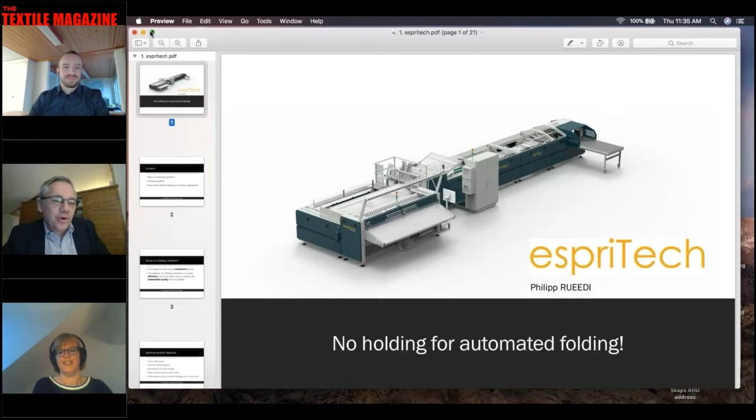Yes, hello. A very good morning, or very good pre-lunch time, I should say, to India, and a good morning here from Europe. Thank you, Cornelia and Ganesh, for the opportunity to speak on this webinar. My name is Philipp, representing Espritech, where we produce automated textile folding machines since many years. Sam Gerber, our CEO, has spent almost his entire professional career on this topic of textile folding.

Over the years, he developed a full range of textile folders that I'm going to show you in just a minute. We are definitely a niche player in the textile machinery sector. We uniquely focus on providing the best textile folders to the home textile industry worldwide. India is currently the country with our biggest installed base, and we have a service engineer located in Vapi.

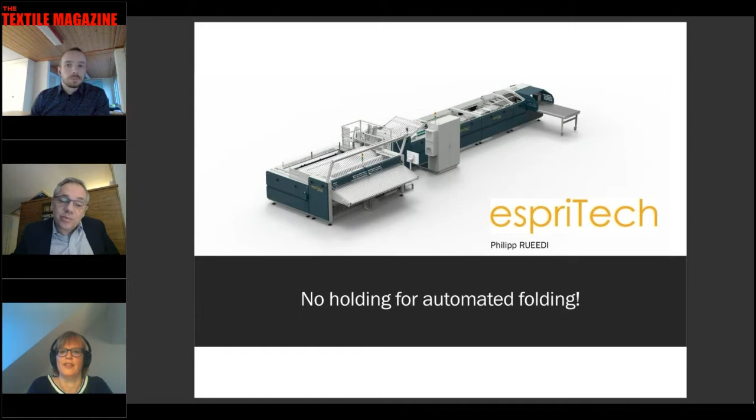The title of my presentation is 'No Holding for Automated Textile Folding.' Of course, that is a slightly provocative title with a double meaning. It refers, first, to the increasing requirement of processing fabrics without touching them. Second, and more important, is the trend towards more automated and maybe also integrated manufacturing methods in the textile industry. Espritech machines provide solutions for both aspects.

My presentation is divided into 3 parts. First, let me talk briefly about what a folding machine actually is, as there are different types in the market. Second, I will go very quickly through our portfolio of machines. In the third part, I will touch on the commercial aspects of automated folding and refer to some business models in which they can operate attractively.

What is a folding machine? There are two aspects to it: one is the function and one is the purpose.

It is difficult to control fabrics, as we all know, because they tend to behave chaotically and provide little stability of their own. In a roll-to-roll or sheet-to-sheet process, you can more or less control the material, but in folding you have to let loose. You cannot fold if you keep the material fully controlled.

Furthermore, precise results must be achieved continuously and fast. Why am I putting so much emphasis on this topic? The reason is it cannot be done with mechanics alone. What we produce is more than just a 15-meter long mechanical Swiss watch.

Espritech combines several competencies to tackle the task. There is a lot of mechanics, for sure, as well as an elaborate electronic steering, about 30 motors, servo drives, and linear motors, and about 250 sensors working combined with pneumatics. In order to secure good results, Espritech provides a mechatronic machine.

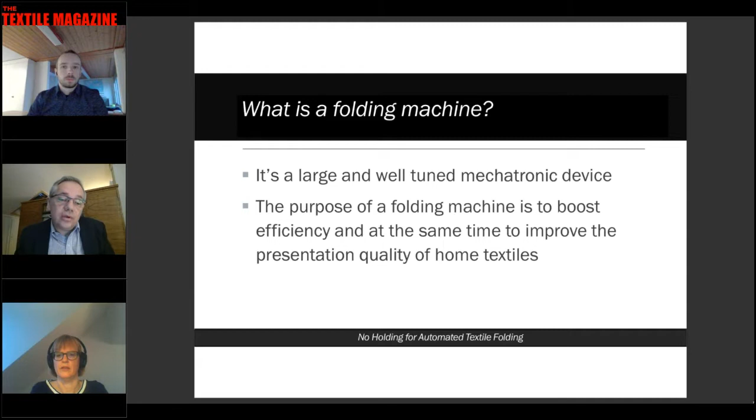You should involve your marketing department. With attractive folding patterns, you can improve the presentation quality. You can also standardize your package formats and your logistic handling, which is often a cost driver.

General features of our machines: all Espritech machines fold to precisely defined measures. We offer various folding patterns which can be individually optimized to your products. All our machines are built in modules which can be adapted to achieve individual requirements.

All our machines are intuitive to handle, but I am not hiding from you that they need an operator who can program the folding steps and who really wants to get the most efficiency out of them. After that, the machines need no changeover nor further setup times. The folding modules position themselves to do the programmed task. So load them, select the program, and let it run.

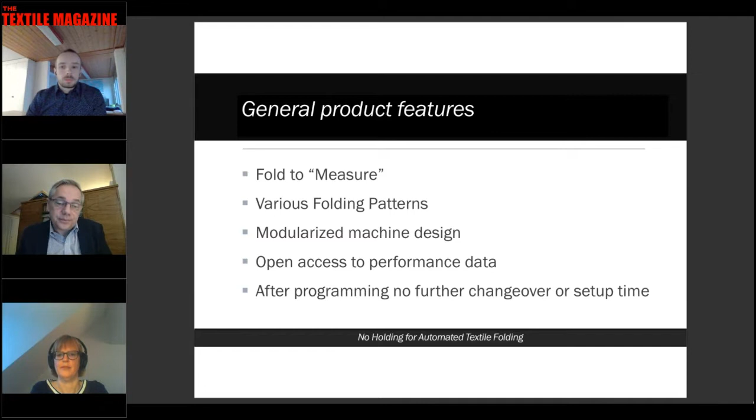Let me briefly go through Espritech's product portfolio. I start with the Blue Sapphire model, which is our apparel and small towels folder. It can also do kitchen towels and other flat products for garments. The capacity of the Blue Sapphire can reach up to 1,050 folded items per hour with only one operator. If I count right, this is more than 17 units per minute.

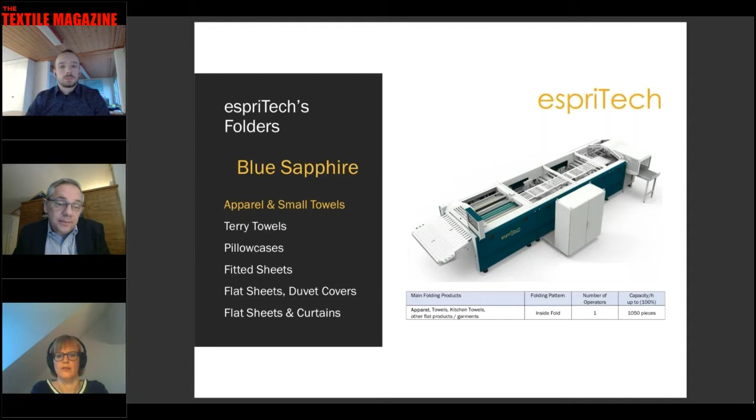The next model would be the Black Opal, which is dedicated for terry towel folding. Towel folding is one of the most challenging tasks for us because the fabric is thick and tends to skew. Even worse, it tends to bow in the folding process itself. Espritech has developed folding patterns which can eliminate or at least hide these problems.

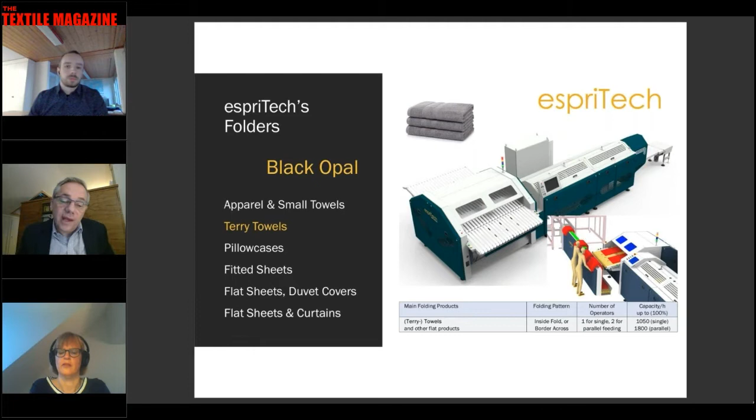For sizes above 70 centimeters, we can fold up to 1,050 with one operator. For sizes below 70 centimeters, we have a parallel feeding option, which you can see in the picture on the bottom right, and then production can go up to 1,800 pieces per hour folded.

The White Sapphire is another dedicated machine for pillowcase folding and other small flat products. The machine can do single or pair folding, and it can reach up to 1,440 pieces folded per hour, which is actually quite a brutal speed. Not our most flexible one, but definitely one with an extremely high output.

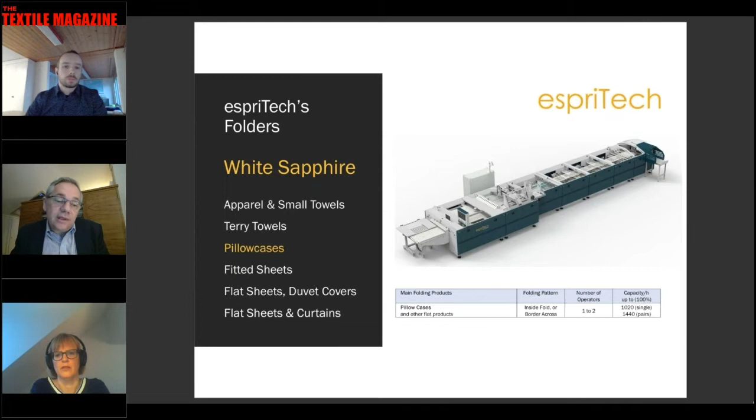The Red Diamond is the first one of our Diamond line. These are the wider machines. They usually have a laser which helps product placement on the feeding table, which is important for best folding quality. This machine can do flat sheets or flat products, but I would say it's mainly dedicated to fitted sheets.

Personally, I struggle five minutes to fold even one manually. With the Red Diamond, you can reach up to 9 fitted sheets folded per minute. The folding pattern here is inside fold.

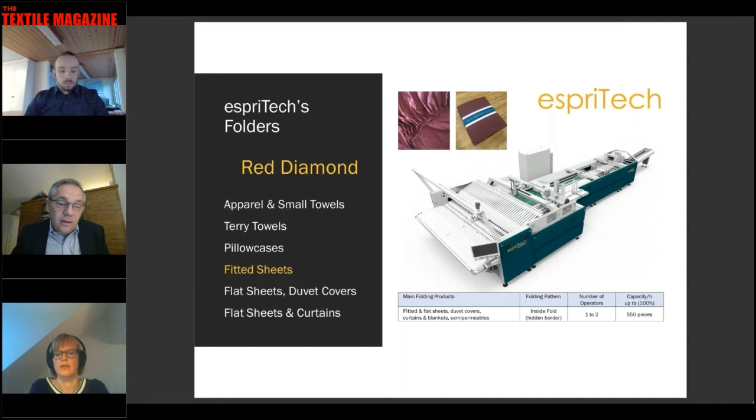So this is a machine which specifically combines high output with the ability to improve the product presentation. It can perfectly place the border of a fabric on the face side across of the final package.

The White Diamond is also available as a set making machine. That means nothing else than that the machine continuously changes the folding process for each item that you load. So you can load, for example, a flat sheet first, then a fitted sheet, and finally two pillowcases, and the machine will combine and assemble them into a set.

The black diamond, last but not least, is simply the mother of all folding machines, I would say. To my knowledge, it is the most versatile folder available in the market worldwide. Features are similar to the white diamond, but it has a 90-degree turned in-feed table, as you can see.

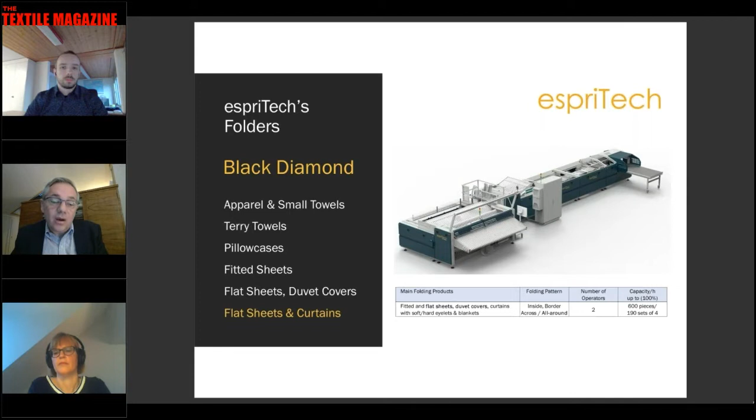We also sell it to high-quality producers, which focus on handling smaller load sizes, but with a higher degree of product personalization. Also, the black diamond is available in a set version.

Unlike manual folding, we do not need the cardboard to define the folded dimensions. That's actually what you do in manual folding. Leaving away the cardboard can be a way to add sustainability to your product.

The Motif Function, please watch the video uploaded on my LinkedIn profile yesterday. It is a feature that is mainly used for digital printed fabrics, where you have motifs and you want to show them exactly on the top face of your final package. It looks easy, but actually there is a lot behind it.

In collaboration with Smart MRT from Singapore, we can offer a solution for color shading issues by keeping similarly shaded fabrics together. Smart MRT provides hanger systems within the textile finishing production, and they also secure that we have enough fabrics in front of our folders.

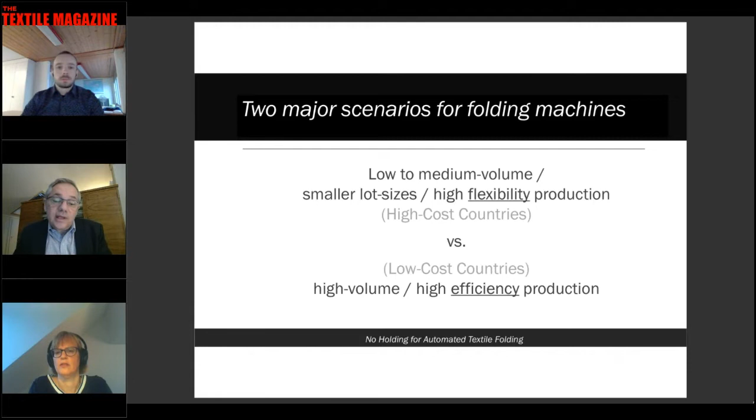I do not think that is the preferred model for the key players in India. What India and other low-cost countries require are solutions to tackle high volume with high efficiency. What are possible options for the labor-intense part of textile finishing in India?

The first scenario is the present status quo: stay with manual processing. That would mean avoiding initial investment - that's positive. But you keep a high labor force, face salary increases and issues of low efficiency, and suffer large stocks between process steps, therefore ongoing high net working capital requirements.

The second scenario is to replace labor with machines. This requires a mindset change - you need to program machines and the production flow. It also means machine maintenance and working in shifts to make best use of capital investments. It means a good relationship with machine vendors because they provide the machinery that is the new heart of your process. Efficiency gains can be substantial though.

I'll give you an example. We recently had a customer in Europe who bought one Espritech folder and replaced 15 manual folders with 2 operators on the machine. That is a ratio of more than 1 to 7.

Now imagine that in a 3-shift scenario, reducing workforce by 39 people per machine, while most of the big producers in India will have volume for several machines. We are really talking big impacts here.

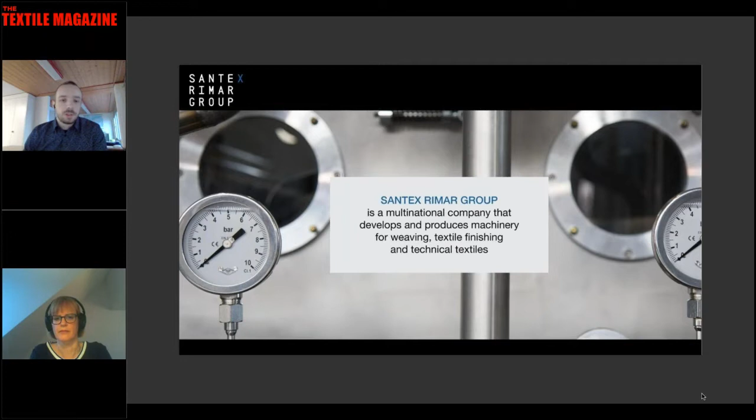Smit is globally recognized as a forerunner in weaving technology and is a manufacturer of weaving machines, renowned for its high standard levels of innovation, productivity, and versatility, ensuring competitiveness throughout a large variety of applications. With more than 50 years of experience, Isotex offers not only a wide range of products, but also innovative and customized solutions.

Santex is at the forefront of technology for textile finishing of knitted fabrics, such as cotton, blended cotton, and viscose. The goal of Santex is maximizing performance at low energy to achieve low residual shrinkage, soft hand feel, and luster on surfaces of textiles. Many of the most world-famous fashion houses rely on the know-how of Santex, which was founded in Switzerland in 1982. Santex offers specialized machines for open-width fabric surface treatment, as well as various energy-saving options, which result in customer benefits through sustainable production and low CO2 values.

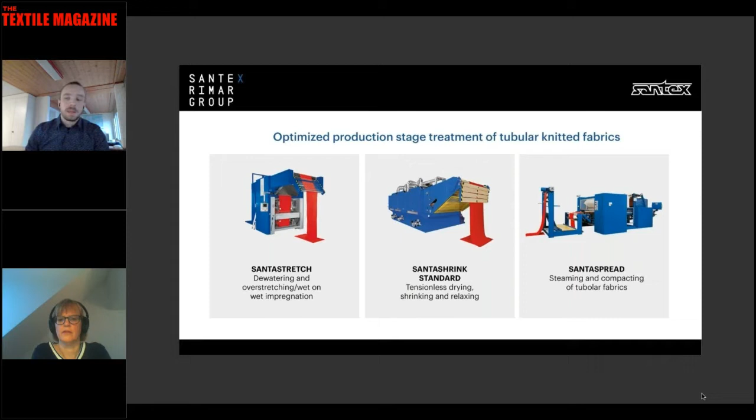The standard version of the Santa Shrink series serves as the basis for the Santa Shrink Progress machine, which is usually equipped with 3 or more drying chambers.

Pin frame entry for width stretching and wet compacting as preparation of the fabrics prior to drying offers unequaled quality gains. The equalizing frame, featuring a needle chain, is the most important part of the extended inlet. The total length of 5.345 meters includes a horizontal swiveling section of 4.5 meters, which permits gentle opening and overstretching of fabric.

The inlet can be of very simple design with a centering device and a feeding support. In general, a dewatering padder is provided and in most cases also an impregnating padder.

Santa Compact RD is suitable for fabrics made of natural and man-made fibers, as it provides the minimum possible residual shrinkage values in the compacting zones and delicate handling of fabric through the machine.

Electronic force measuring rollers are at every regulation position, providing total control over fabric tension, extremely gentle fabric handling, and allowing settings to be stored in a recipe for added repeatability.

At the heart of the Santa Synpact's incredible performance is how the rubber shrinking unit and specially dimensioned felt compacting unit work together to double both the sanforizing performance and speed over standard compactors.

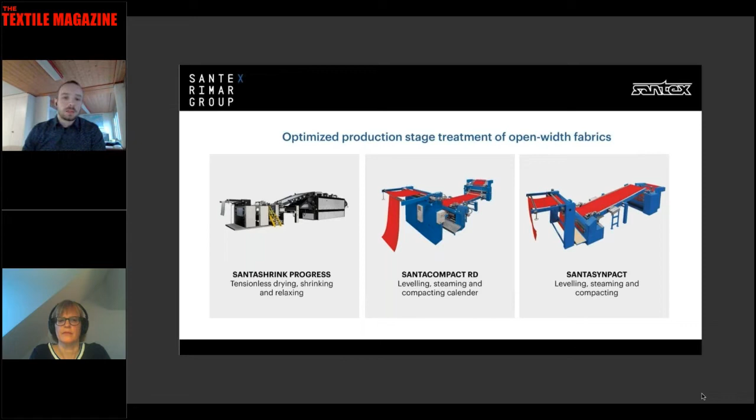High performance and precision in terms of efficiency and uniformity of treatment assures customer value and quick return on investment. With its design and thermal insulation, the Santa frame ensures cost savings in comparison to conventional stenter designs.

The performance and production of the Santa frame is based on continual development using the latest advances in thermodynamics, allied to the changing needs of customers.

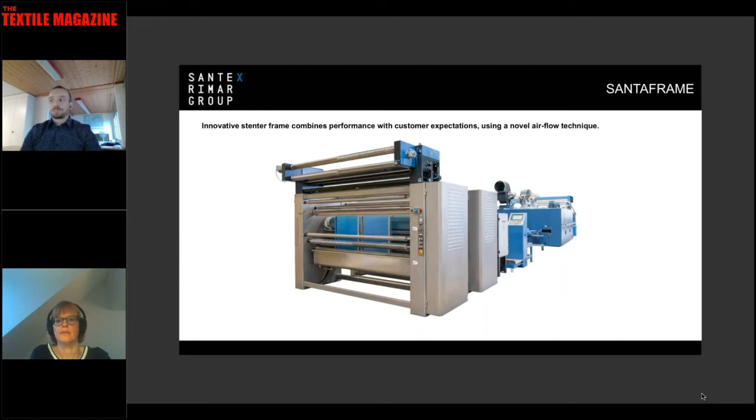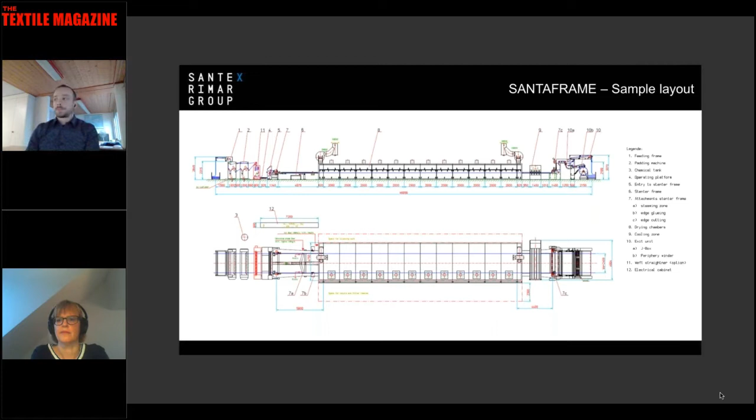This arrangement eliminates the risk of condensation dripping onto the fabric. Positioning the heat source on the pressure side significantly increases the evaporation rate without any change in energy consumption, due to the higher airspeed and specially designed nozzles.

Excellent quality of the treated fabric due to the suitably designed AERO-SURF nozzle system promotes even treatment, excellent residual shrinkage, and softest handle for sensitive fabrics.

Minimal combustion residue by utilizing semi-indirect gas heating as an alternative to thermal oil heating during the heat setting or curing processes. Increased performance and precise temperature control during processing with minimal energy loss, by introducing bulkhead zones at the inlet and outlet.

Savings in energy consumption as a result of a specially designed built-in exhaust air circulation duct, which in combination with heat recovery units reduces installation costs.

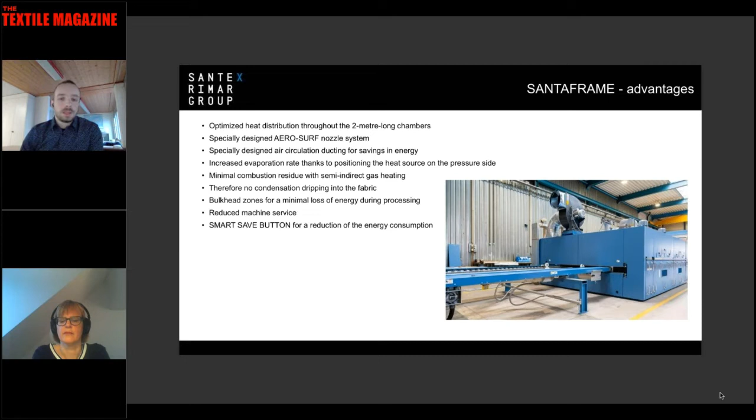The modular 2-meter-long chamber design allows complete pre-shipment assembly, cabling, drive assembly, and installation of the selected electronic control system before the machine is dispatched. The result: highest quality assured standard of all delivered machines.

The design of the Santaframe provides effective insulation and does not require floor foundations for installation. Bulkhead zones at the inlet and outlet of the treatment chambers form the drying and heat setting zone.

The bulkhead zones feature an automatic slot cover on the width adjustment at the fabric inlet and outlet, as well as an integrated exhaust air collection duct for the connection of an exhaust air fan.

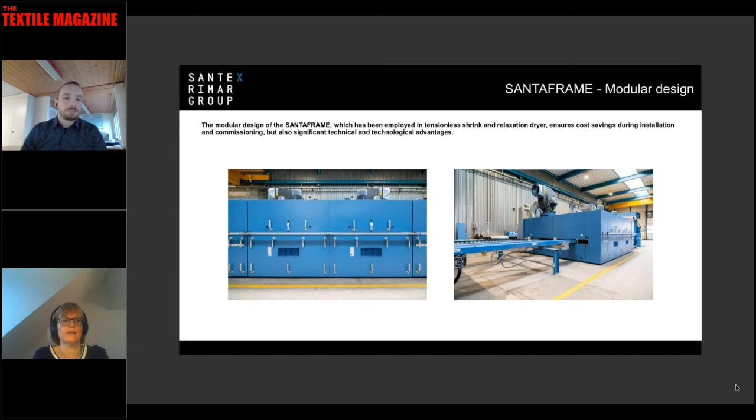The circulating air fan draws the air from the nozzle and treatment zone through the filter panels and directs it along a short path to the heat exchanger, from where it is fed into the nozzles. A regulating flap in front of the nozzle boxes allows the top and bottom airflow to be continuously adjusted. The arrangement of the heat source on the pressure side of the circulating air fan allows for a high air circulation speed and hence a higher drying capacity. The result is energy saving and cost reduction in the drying and heat setting of textile fabrics.

When the pin chain stops, the hot airflow into the nozzles is immediately diverted by pneumatically operated bypass flaps that close completely. The hot air is routed into a bypass where the process temperature is maintained. Once production restarts, there is no need to reheat the circulating air and fabric treatment resumes under optimum conditions at the required production speed.

With semi-indirect gas heating, the flames are located in a combustion chamber. Hot air is introduced to the circulating air via a large perforated distribution pipe, which ensures a very even temperature distribution. Conventional systems heat the recirculating air over the open flame of the gas burner.

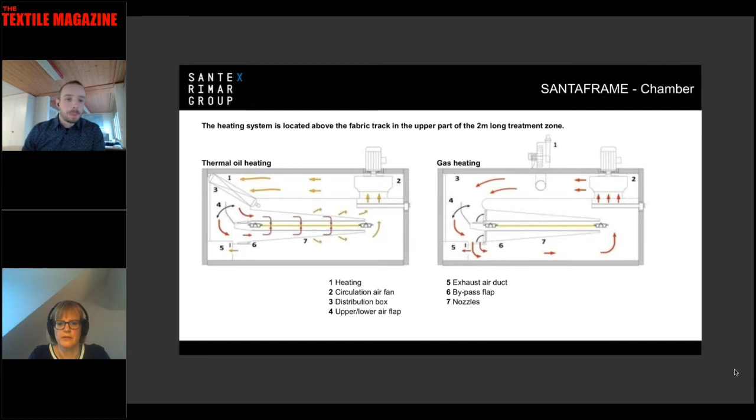The filter screens located above the nozzles simplify cleaning even whilst the stenter frame is running. The exhaust air collection duct is integrated into the lower part of the thermal processing chamber. Doors allow easy access for the adjustment of the exhaust air volume and cleaning of the exhaust air duct.

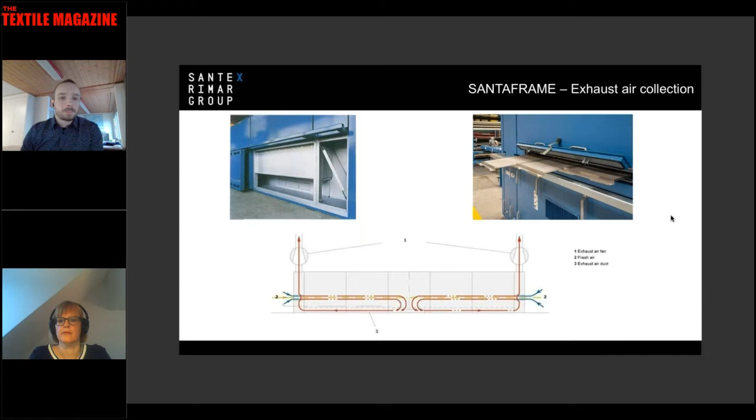Ring-shaped openings around each guide pipe ensure the controlled and turbulence-free return of air to the circulating air fans. As a result of the special nozzle design, the fabric floats on an air cushion, giving textiles a soft, voluminous handle and excellent residual shrinkage.

As an alternative to AERO-SURF nozzles, simple hole-type nozzles can be fitted for the finishing of woven fabrics, or slotted nozzles for the swirl-free treatment of pile articles. Santaframe contain nozzle boxes which are tapered on one side, inside which the nozzle plates are inserted. These nozzle plates can be easily removed for cleaning.

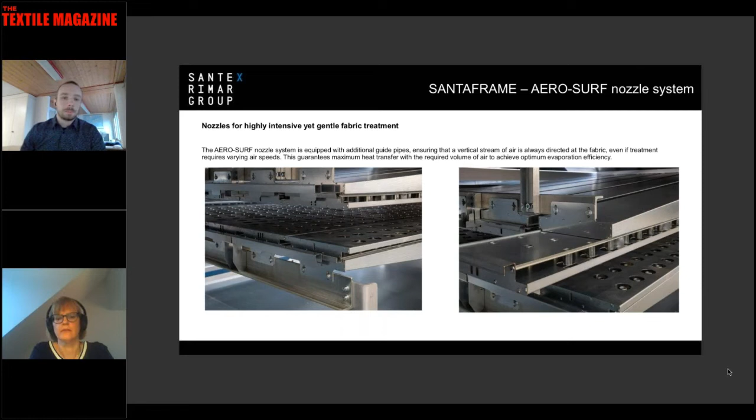Individual drives on the spindle type width adjustment system within the thermal zone of the Santaframe guarantee accurate width adjustment, ensuring flexible stretching of goods being treated, and can be programmed automatically from a central location. Fabric transport chains are equipped as standard with independent frequency control drives that can be run either synchronized or offset.

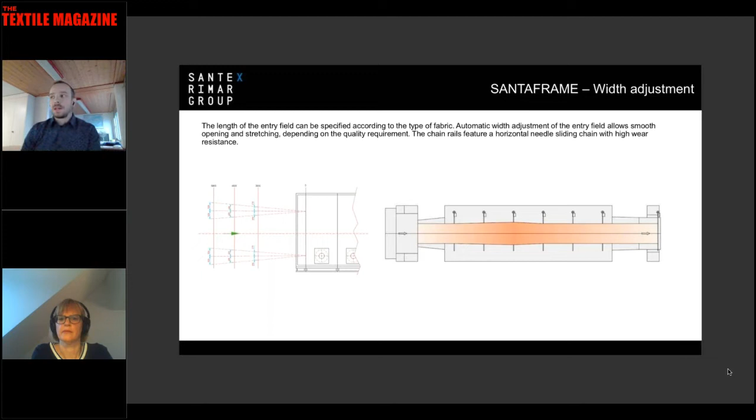The horizontal transport chain is designed as a gliding chain with high wear resistance, requiring very little maintenance. Chain links are made from high-grade durable PEEK material, or with ball bearing when processing heavier fabrics that require higher pulling tension. The carrier parts can be supplied with pin plates either with or without de-pinning protection, or as a combined pin clip or clip only. Depending on the requirement, special pin bars and clip types are available on request.

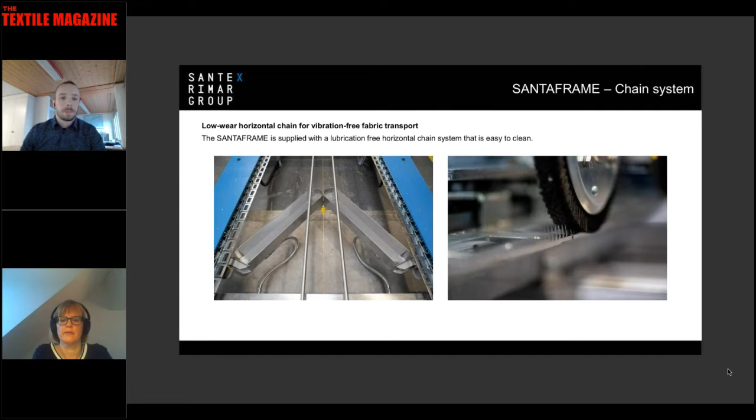One driven spreading roller is located in front of each trough. Two other spreading rollers ensure optimal uncurling of the selvage before the fabric enters the nip section. The impregnating trough with 65 liters content can be lowered for ease of cleaning. A displacer is installed to minimize the trough liquor content. The compartments are made entirely of stainless steel.

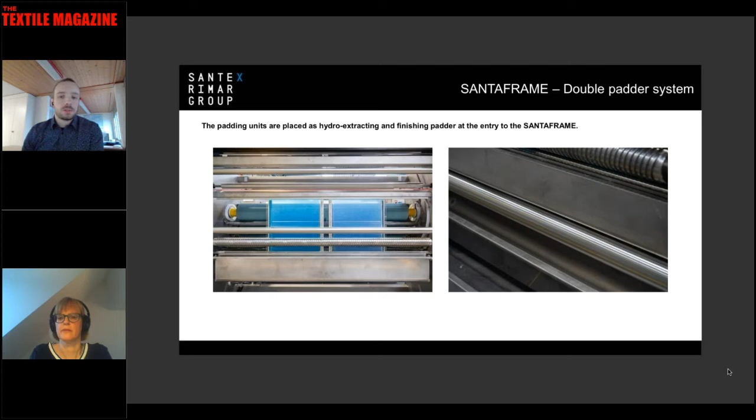Santex can offer various entry and exit configurations, such as unbatching systems for the most tension sensitive and less delicate qualities, unbatching systems for dye beams, centering devices for knits and/or woven fabrics, padders for the most diverse dewatering and impregnating processes. Automatic weft straighteners are available from reputable European manufacturers. Non-stop entry and exit options with either fabric troughs or storage compensators. Batching systems for the most tension sensitive and less delicate qualities. Batching systems for dye beams, or various exit combinations with plater. Special requests for fabric entry and/or exit can be offered.

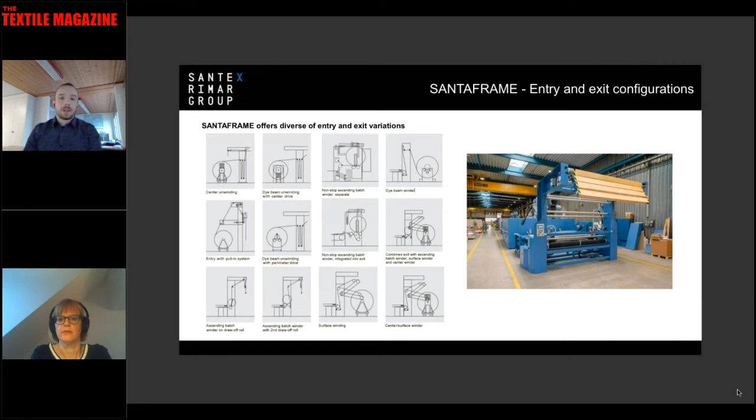The automatic process control and regulation, with customized programs containing all parameters associated with the finishing operation, setup and control require minimal operator input, affording greater operator freedom for observation, preparation and final adjustments. These systems administer the production data, incorporating production planning, quality assurance, as well as facilitating remote support, maintenance and diagnostics.

SantaVision hardware and software supports process visualization. Stored program control provides optimal solutions for automation, communication, data processing and storage on machines manufactured by Santex. SantaVision is installed on an industrial computer communicating with a PLC controller connected to the machine.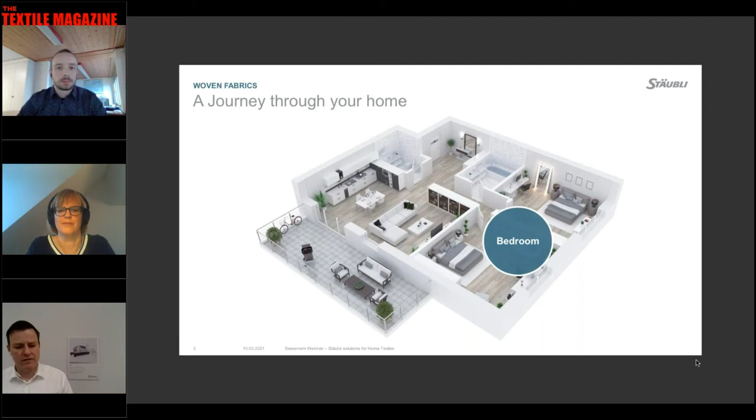So let's start this journey through your home, in your bedroom. In the bedroom, to manufacture these products, you need warp tying machines, you need dobbies, and you need drawing in machines.

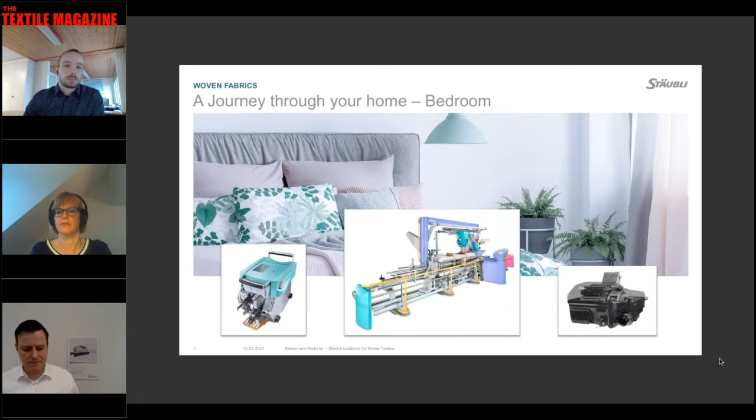In the bathroom—after you wake up, you go to the bathroom—here, for terry application and highest flexibility designs, you need single end control on your jacquard machine. With our LXL jacquard machine, for example, you can reach weaving speeds up to 700 RPM on 2.8 meter width, and almost up to 600 RPM at 340 centimeters, or 3.4 meter width.

This is today's standard in India, and nothing written on the data sheet, but this is in production in India 24/7. So you get this high capacity, and as I already said, full flexibility—if you have single end control you can vary the width, the shape, and the design of all your towels.

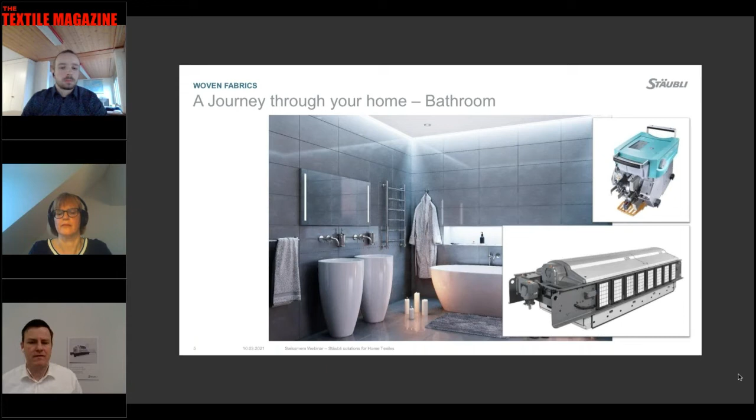To start the day, of course, you need a good breakfast, so you go in the kitchen. You have these nice napkins and handkerchiefs. For these pattern designs, you use a rotary dobby, of course, on your weaving machine, and you have maximum flexibility and performance in weaving.

With our S3260 series dobbies for air-jet weaving and our S3060 series for rapier weaving machines—on the rapier we do up to 20 frames, of course, and up to 1000 RPM can be achieved with our dobbies on air-jet weaving machines.

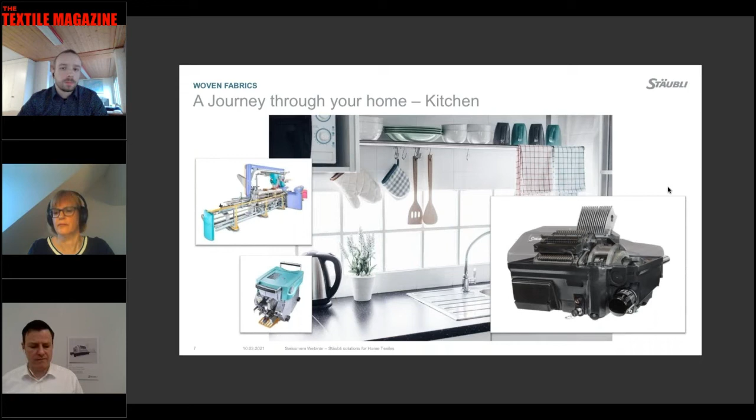Outdoor—let's go outdoor after breakfast. Stäubli provides solutions for carpet weaving, for example for wall-to-wall carpets or rug carpets, high or low pile, high density carpets, and lightweight requirements also for aircraft industry, automotive, general transportation, and first-class cricket fields, for example. You can use our carpet machines, also known as Schönherr carpet systems.

Of course, for sun blinds and sunshade fabrics, you use the Stäubli cam motion on drawing in machines. This shapes the portfolio of all our products.

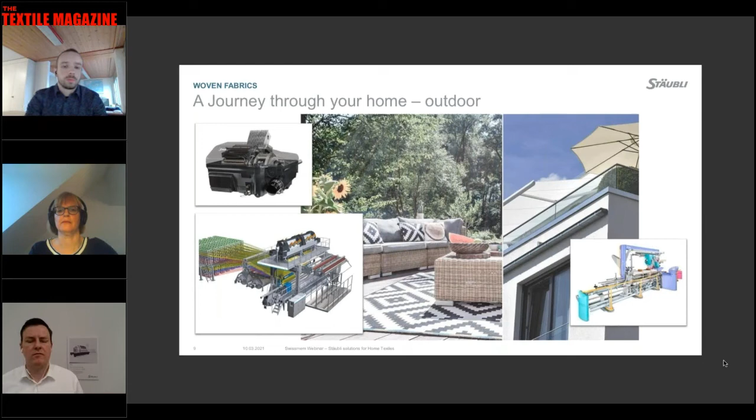Going back in the living room.

For upholstery industry, curtain industry, all these things. Also, let me talk about the warp tying.

Here we have the revolutionary Tie Pro warp tying machine, now well introduced in the Indian market in home textiles. The revolution here is in the separation of the yarn ends, which is now done with spindles, no more with needles. Irrespective of the yarn shape or yarn size, you use the same spindles, so there's no more need of changing the individual needles.

This machine has way less mechanical parts than the traditional machine, resulting in easier maintenance. You don't need to make any oil bath on these types of machines, so availability in the weaving shed is higher. And of course, the operation is state of the art—easier to operate. Training can be reduced, or even less skilled operators can handle this type of machine.

A success story from these special times: we did an installation in a country in Europe where we could not travel, and this tying machine is now tying without installation of a service technician. This should explain the ease of operation for such a machine in your weaving mill.

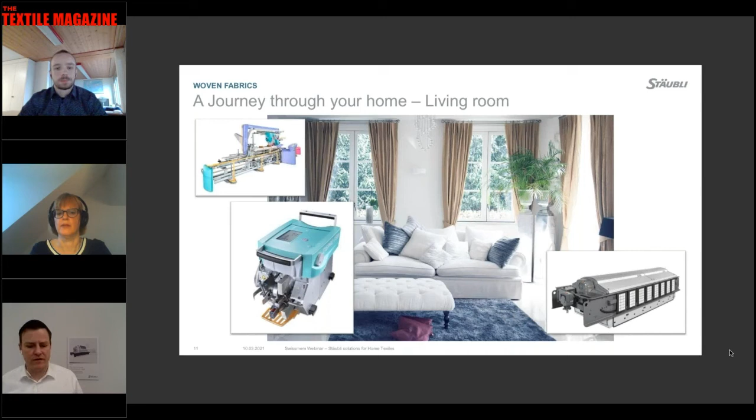Next slide please. Whatever the woven home textile, we have a solution which helps you to increase performance, increase efficiency, and automate your solution.

And of course, we are a family. Stäubli is a family-owned business. We have a product range family, and we can help your family also for every woven product, at home, in the transport, and in the apparel sector—all catered by Stäubli.

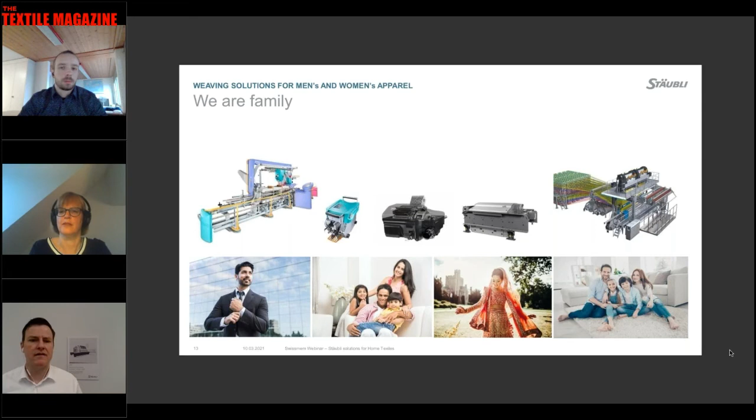As you know, Stäubli is active in many countries across the globe. We have 5,500 employees, and 1,500 engineers in field service. Overall, we are split into three activities across 4 divisions, and Textile is the source of this fantastic company. So next slide.